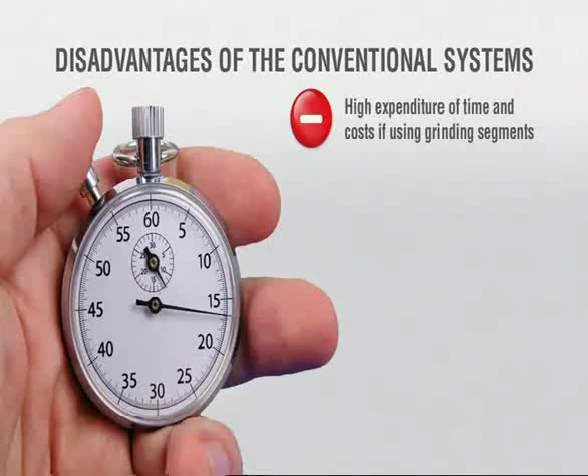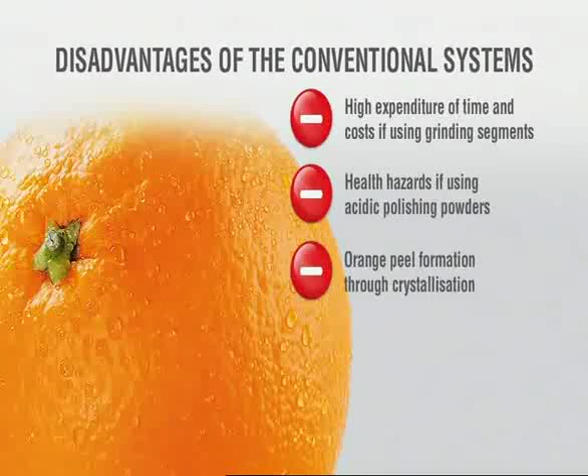Indeed, natural stones have for many years been ground and polished, but the conventional systems like grinding segments, crystallization or wax polishing always reveal significant disadvantages, such as high expenditure of time and costs if using grinding segments, health hazards if using acidic polishing powders, orange peel formation through crystallization, no permanent gloss with wax polishing.

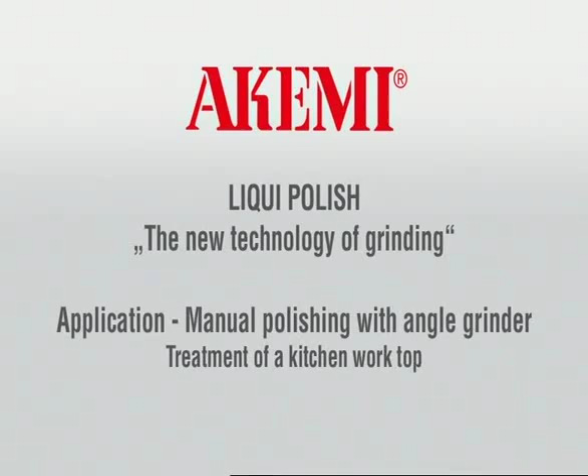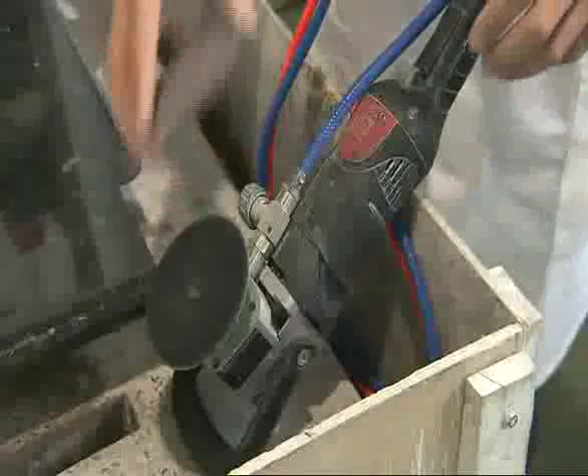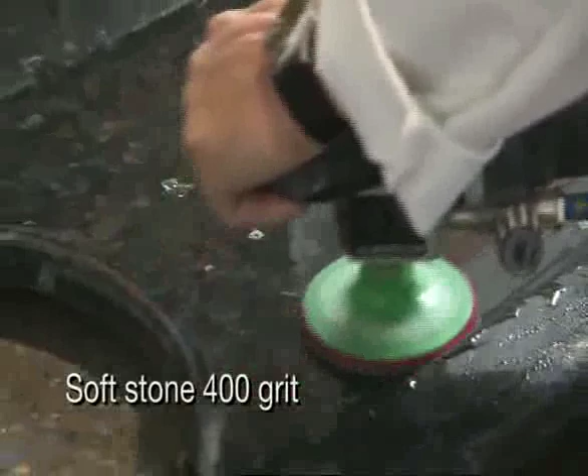Application: manual polishing with angle grinder. Treatment of a kitchen worktop. Using the example of a kitchen worktop, we will demonstrate the application of Liqui Polish with an angle grinder. The pre-grinding has to be processed according to the type of stone. Soft stone 400 grit, and for hard stone 1500 grit.

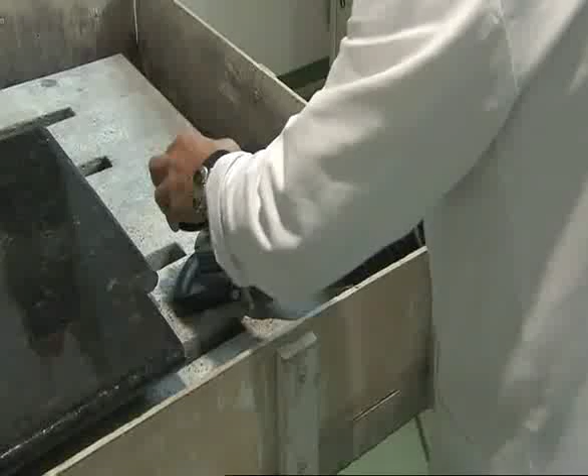The surface is then cleaned. The gloss meter shows a degree of gloss of 9 after the pre-grinding. Now Liqui Polish, in this case the product Granite Black, is applied. And the worktop can then be ground and polished in one single process. The diamond pad has to be replaced with an Akemi Liqui Polish pad, which then has to be briefly wetted.

After a short cleaning, the treated surface shows high brilliance. Previously, the surface was matte and without any gloss. Here, once again, the comparison, before and after using the Liqui Polish system. This success is clearly measurable. Before, we had 9, and now we have 86.

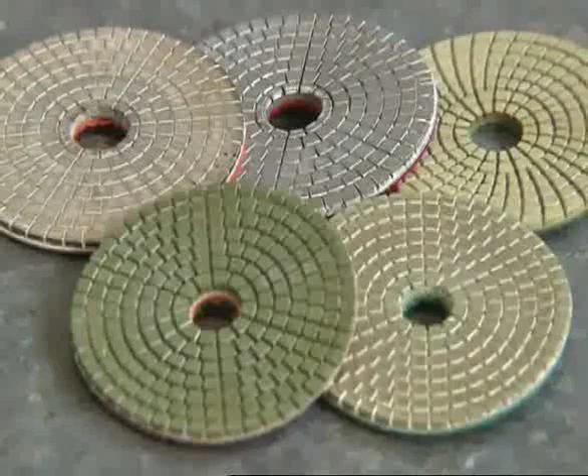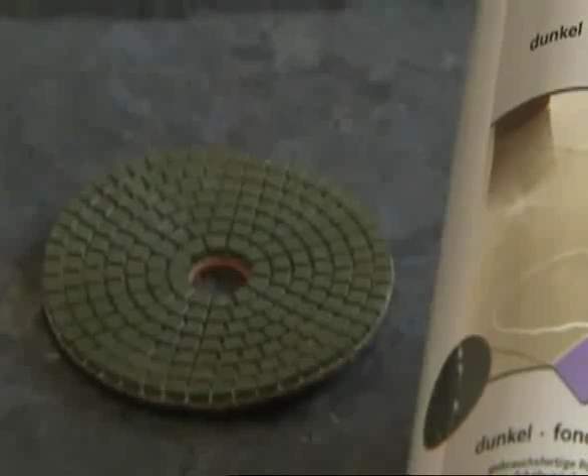In order to obtain a comparable result with conventional grinding segments, several grinding and polishing steps would have been necessary after the pre-grinding. With the aid of the Liqui Polish system, a high-gloss surface finish can be achieved in just one single grinding and polishing step.

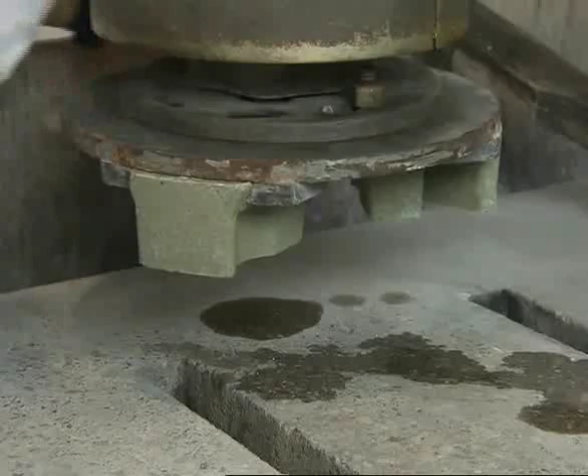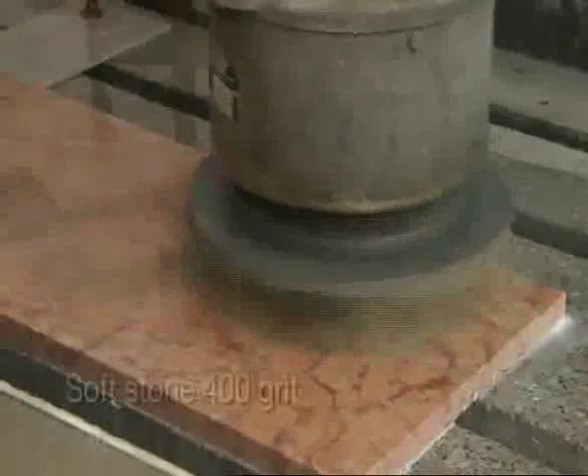Application: wall-mounted single-head polishing machine. Treatment of a stone slab. Using the example of a stone slab, we will demonstrate the application of Liqui Polish with a wall-mounted single-head polishing machine. The pre-grinding has to be processed according to the type of stone. Soft stone 400 grit, and for hard stone 1500 grit.

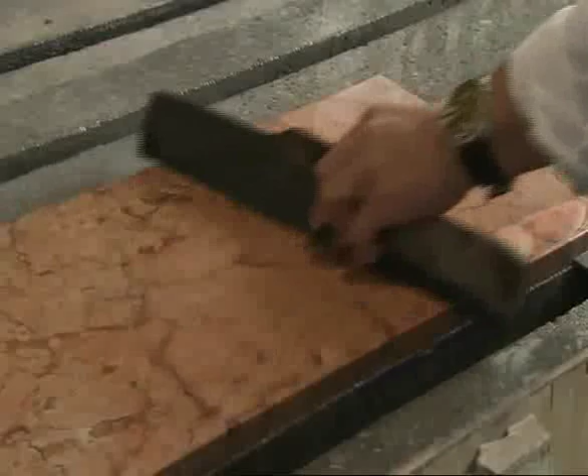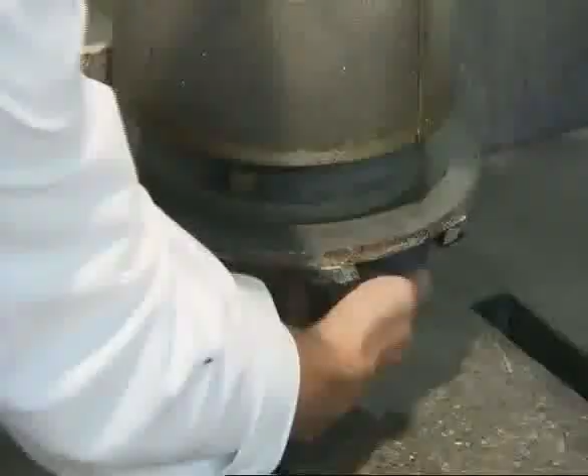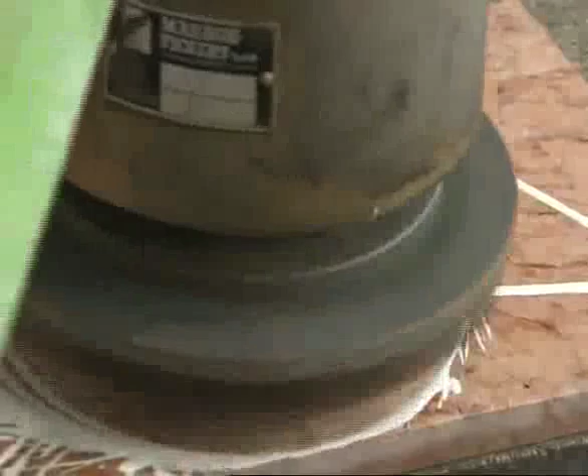The surface is then cleaned. The gloss meter shows a degree of gloss of 11 after the pre-grinding. The abrasive segments have to be replaced with Akemi Liqui Polish pads. Now, Liqui Polish, in this case the product Marble Light, is applied to the sample and ground and polished in one single process with the wall-mounted single-head polishing machine.

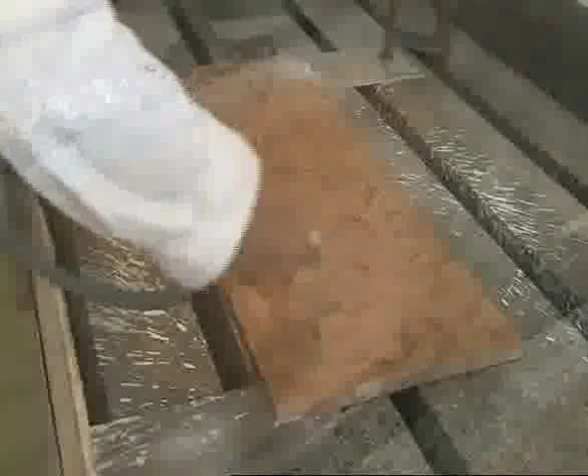In this example, only the right side of the sample piece has been polished in order to show the difference between the treated and the untreated part. Then the sample is cleaned thoroughly. After only a few minutes of treatment, the required high-gloss surface is obtained with the help of Liqui Polish. The success isn't just visible to the eye, but also measurable. The untreated surface showed a degree of gloss of 11, whereas the treated surface actually shows 90.

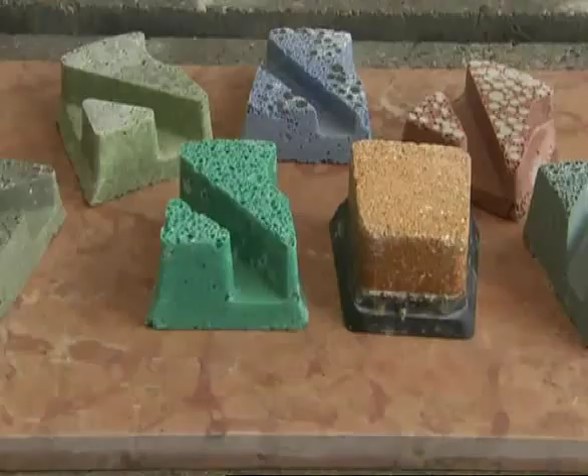In order to obtain a comparable result with conventional grinding segments, several grinding and polishing steps would have been necessary after the pre-grinding. Thanks to Liqui Polish, the amount of work is considerably reduced.

The advantages of the Liqui Polish system. First of all, Liqui Polish verifiably reduces grinding and polishing work. This results in considerable time and cost savings. It is a clean substance which can be handled without health risk. Environmentally friendly because it's a 100% natural product.

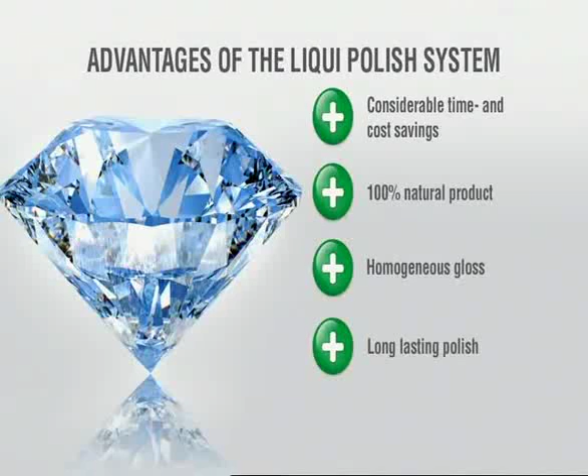Liqui Polish is a purely mechanical polishing agent which enables the use of one single product for several grinding and polishing steps. Thus, a homogeneous gloss is obtained which doesn't form any orange skin. Furthermore, the polishing agent Liqui Polish provides a long-lasting gloss because it doesn't contain any waxes. Additionally, the polishing agent can be used universally for application on various stones and fittings.

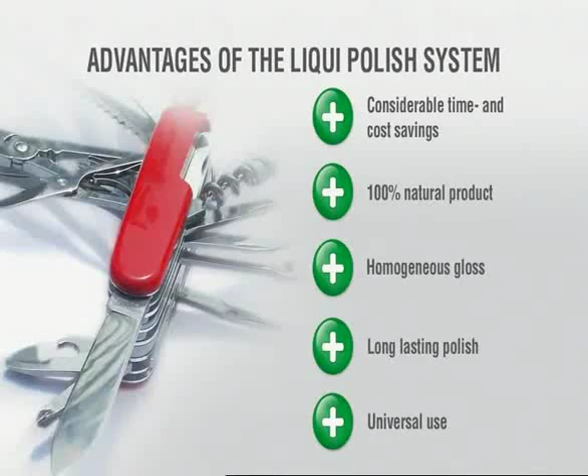Application: floor polishing machine. Treatment of worn flooring. Using the example of some worn flooring, we will demonstrate the application of Liqui Polish with a floor polishing machine.

Firstly, the surrounding area is masked. This is to protect from soiling, even though there won't be any risk of severe damage from aggressive agents like acids. Liqui Polish is a 100% natural product.

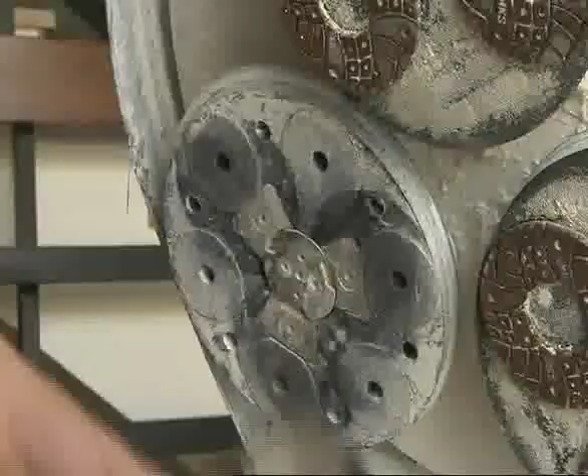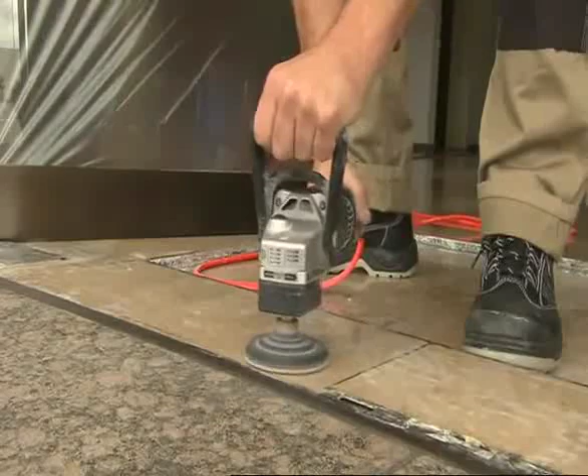A pre-grinding process with abrasive segments must be done. Soft stone 400 grit and for hard stone 1500 grit. Corners and edges which can't be reached with the floor polishing machine are treated with an angle grinder.

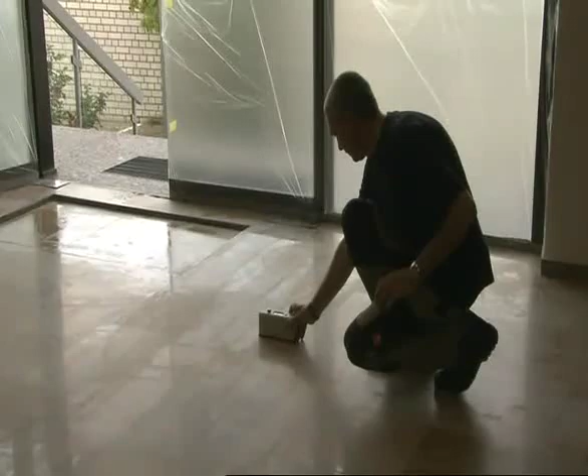Afterwards, the surface is cleaned and the dirty water removed. The gloss meter shows a degree of gloss of 5 after the pre-grinding. The Liqui Polish pads are wetted and then exchanged with the abrasive segments.

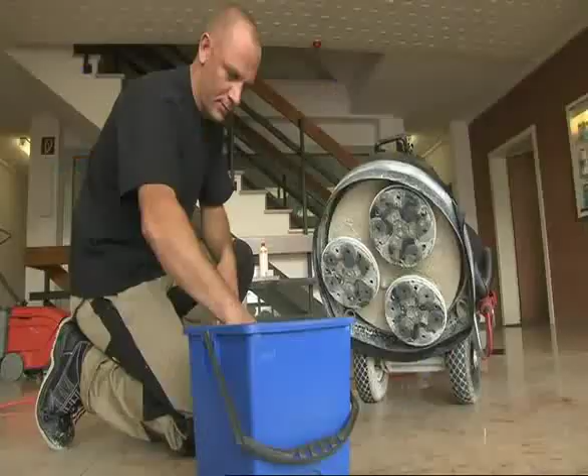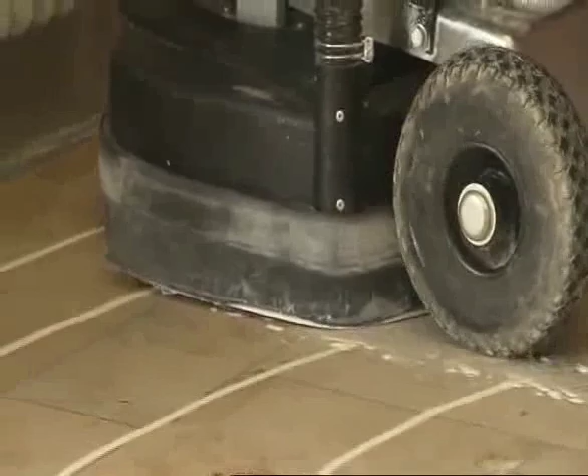Detailed information about the correct use of Liqui Polish can also be found on the label. Now, briefly shake the Liqui Polish, here the product Marble Light, and divide it into sub-areas on the pre-ground floor for further processing. Now use the floor polishing machine to grind and polish the surface in one single working process.

Finally, the surface must be thoroughly cleaned. After the treatment with Liqui Polish, the high gloss of the floor is clearly visible. Previously, this was a dull and worn flooring, with a matte surface and without any brilliance. Once again, the comparison. After the treatment with Liqui Polish, we obtained a high gloss surface.

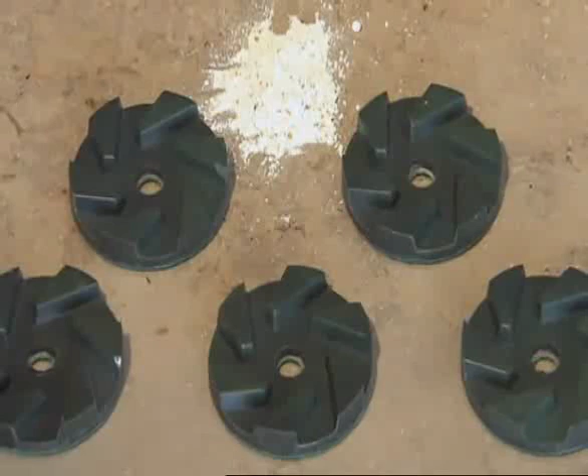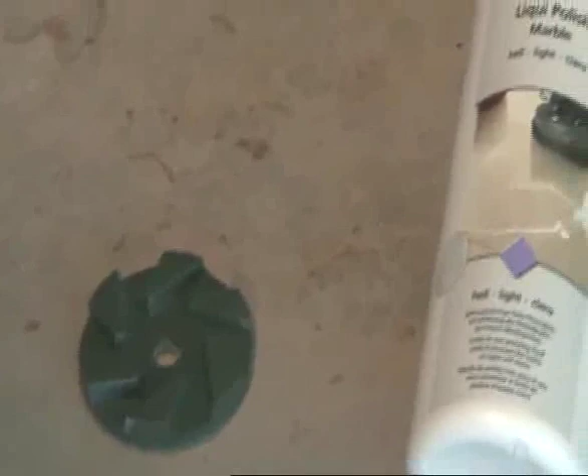This success is clearly measurable with a gloss meter. The degree of gloss is now at over 90, compared to 5 before the Liqui Polish treatment. In order to obtain a comparable result with conventional grinding segments, several grinding and polishing steps would have been necessary after the pre-grinding. Thanks to Liqui Polish, the amount of work is considerably reduced.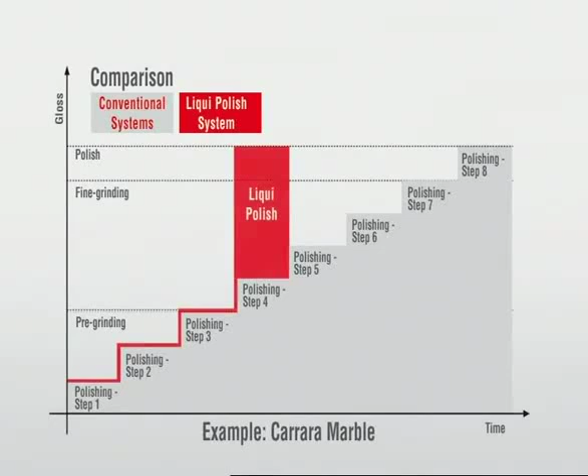Here, a graphical overview to emphasize this result. Using the example of Carrara marble, we show all the grinding and polishing steps required by the conventional system. And in comparison, the innovative Liqui Polish system. Several grinding and polishing steps are replaced by one single application, resulting in a time saving of up to 50%.

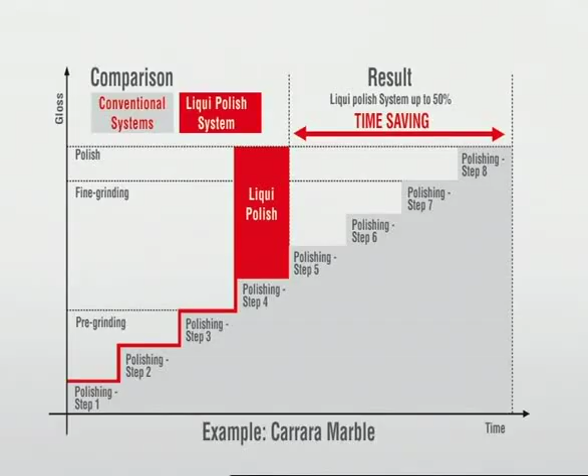Further application examples. 1. Polishing of an edge. 2. Removal of stains on a windowsill. 3. Removal of lemon stains. Now that you're familiar with the use of Liqui Polish on different machines, we would like to show you some other common fields of application.

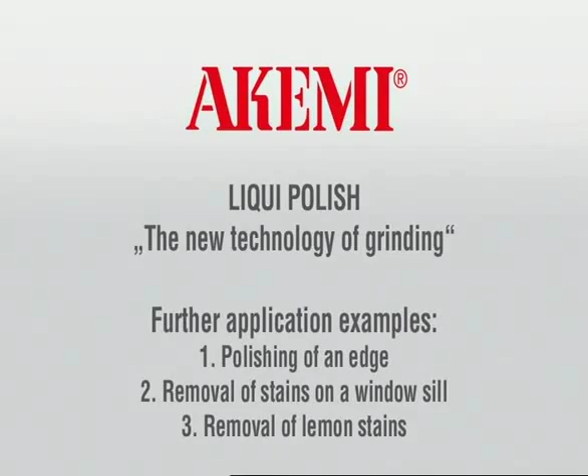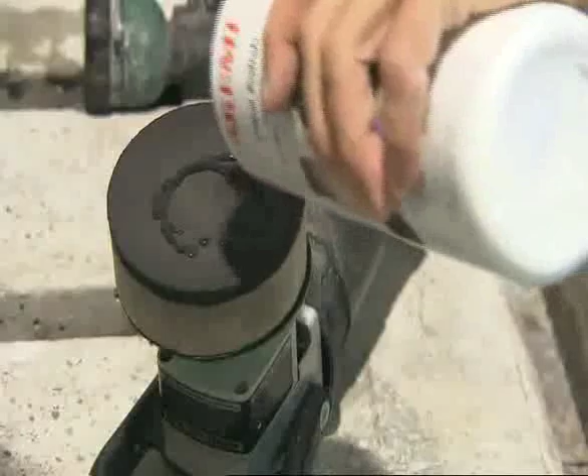Polished edges are very easily and quickly attained. Simply apply Liqui Polish, in this case the product Granite Black, and polish the edge manually with an angle grinder. Afterwards, clean and dry the surface and obtain a perfectly polished edge after just a quick use of Liqui Polish.

And that's not all. Unwanted limescale on windowsills or nasty corrosion marks from acid liquids are effortlessly removed. This is where Liqui Polish comes into its own. First, apply Liqui Polish, in this case, Liqui Polish Marble Light.

Then, polish the damaged area and then clean and dry the surface. Thanks to Liqui Polish, a top result can be achieved. All the stains have gone.

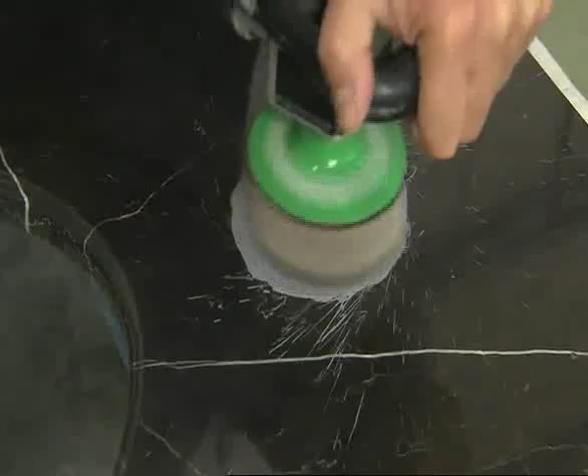Even corrosion marks from a lemon on a wash basin can be easily removed with Liqui Polish. First, apply Liqui Polish, in this case Granite Black, then polish the surface and subsequently clean and dry it. Result: the acidic stain from the lemon, thanks to Liqui Polish, has been removed quickly and easily.

Here once again are the advantages of Liqui Polish. Considerable time and cost savings. 100% natural product. Homogeneous, high-gloss surface finish. Long-lasting polish. Multi-purpose use. Liqui Polish, the new technology of grinding.